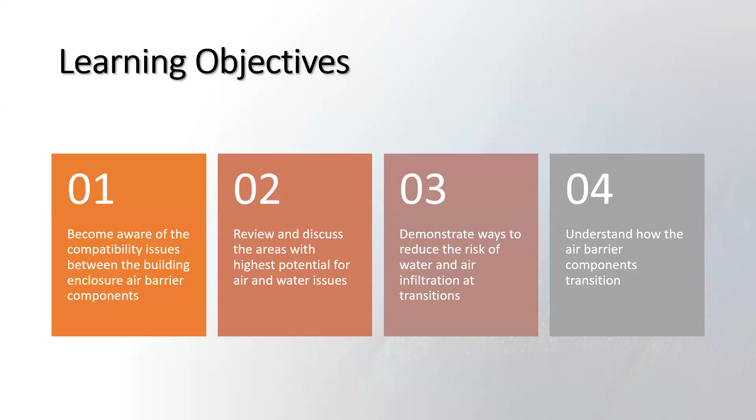With all that, my goal today is to emphasize how important it is to get the transitions right in the building envelope. And we're going to provide an overview of where those transitions are, the things that we have to keep in mind when we're determining what products to specify and install at these transitions.

The building envelope, it's a huge topic. We'll start our introduction here. There's entire presentations and lectures on the building envelope. But today, I figure this is a good place to start rather than jumping right into the transitions. The idea here is to keep the outside out and the inside conditioned air in. In order to do that, we need to look a little bit more closely at the 4 control layers. And these are the 4 control layers around our building envelope that we want to get right.

There's entire presentations on how you trace these layers. We need to understand each layer and its importance when we make decisions about what products to use here. At the end of the day, you want them all to work together, and they need to be compatible. So that's a hot topic and a concept that we'll discuss pretty thoroughly today. They need to be compatible and properly integrated.

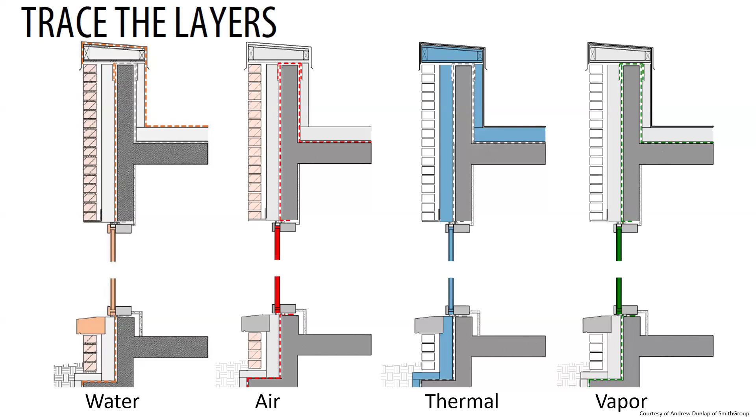So when you look at transitions as a whole, they provide that continuity for each of these four barriers: your water, air, thermal, and vapor. The number one job is to stop water. And it's no secret that water can lead to severe damage in our walls. Ideally, we don't want any leaks, but we also want to make sure that we're providing drainage for when that water does get into our walls, it has the opportunity to get out of the wall.

Number two, we need to stop air. The whole purpose of the air barrier is to reduce your airflow in and out of the building, and this is to prevent water and moisture issues. This little graphic on the screen, I think it's pretty astonishing that if you consider just a really small hole, 1 inch by 1 inch, over the course of a year, you can have 30 quarts of water get inside your building just through that 1 inch by 1 inch hole. And maybe you don't have a hole that size. If you break it down, let's say you have 4 holes that are each a 1/4 inch, it can still lead to this amount of water, which is, when you put that into perspective, quite a bit.

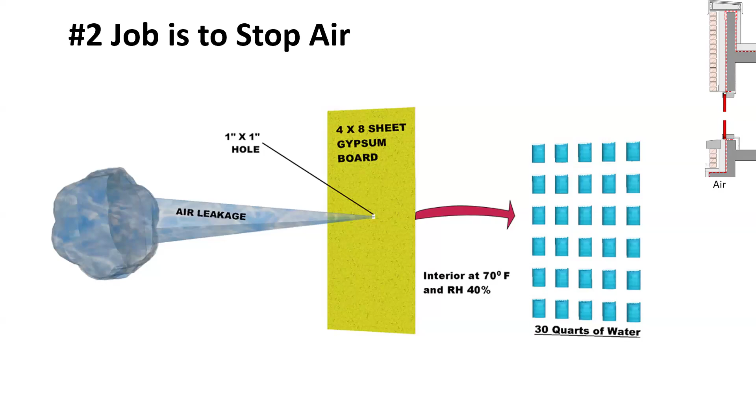The third layer here is our thermal control. A lot of people refer to this one as the building's blanket. This layer, we're not really getting into this one today. This would be your insulation materials, and the whole goal of those materials is to help maintain your indoor temperatures, reduce heat loss and gain, and just enhance your overall energy efficiency of the building.

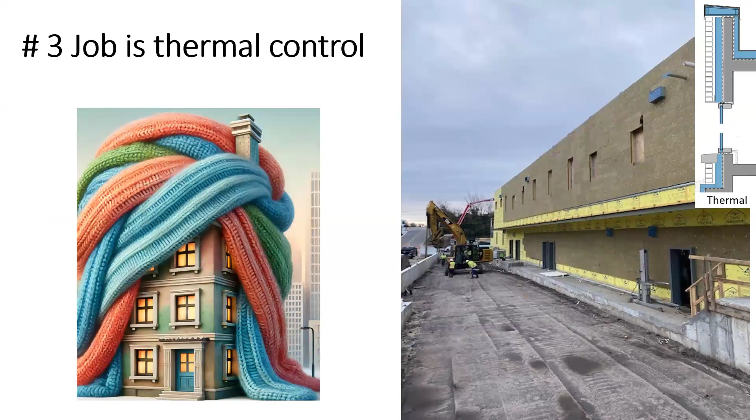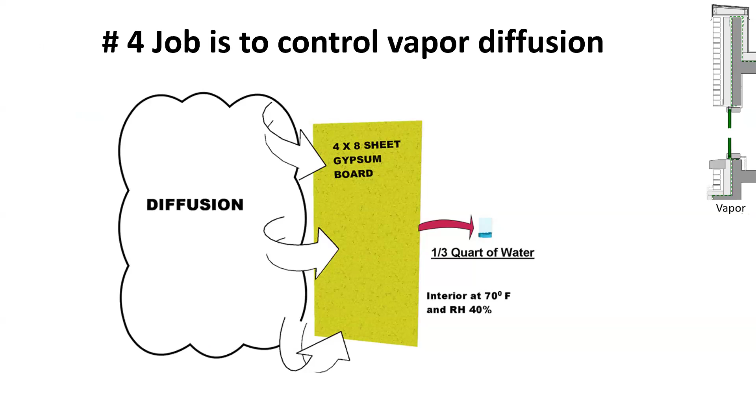And then the fourth layer, and again, this is just a really simple overview of these layers, and they can get pretty complex. We have a lot of materials coming together. This is just kind of to open up the presentation before we get into the transitions. The fourth layer is for controlling vapor diffusion. So we saw a similar image to the one on the screen now when we were looking at the controlling air slide. A lot less water than the 30 quarts of water that can result from a 1 inch by 1 inch hole, but it's still important to control the movement of our water vapor through the building envelope.

So you're looking at a big red line around your building. You may have heard of this strategy before, of putting your pencil down and tracing the layers without lifting it up. The whole reason we want to do this is to make sure that we're getting that continuity across our building envelope between our systems. So you can see that red line that goes all the way around the building, there are no gaps. And some people will call this the red pen test. The whole point of this is to identify all of the locations of the components that make up those 4 layers that we just reviewed: the water, air, thermal, and vapor.

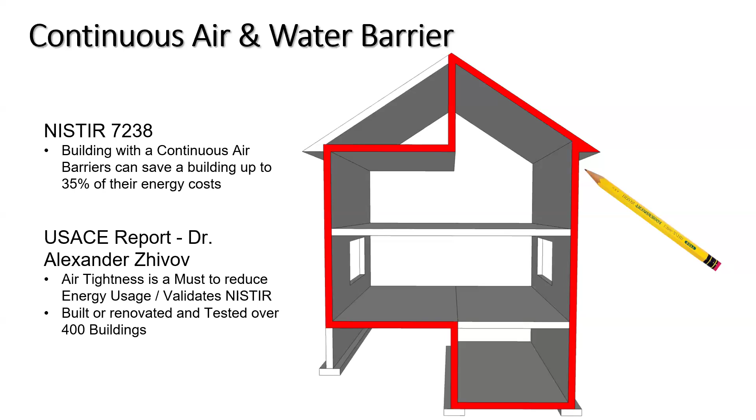So the question of continuity or compatibility comes up when we are changing from one system to the next, or we change from one product to another. And that's where we get into this whole idea of transitions. What is a transition? It's when something is changing in plane or material. So consider when you move from an air barrier to a below grade product, or from an air barrier to a roofing system. You can't just pick up your pen and restart the next system. It has to be continuous.

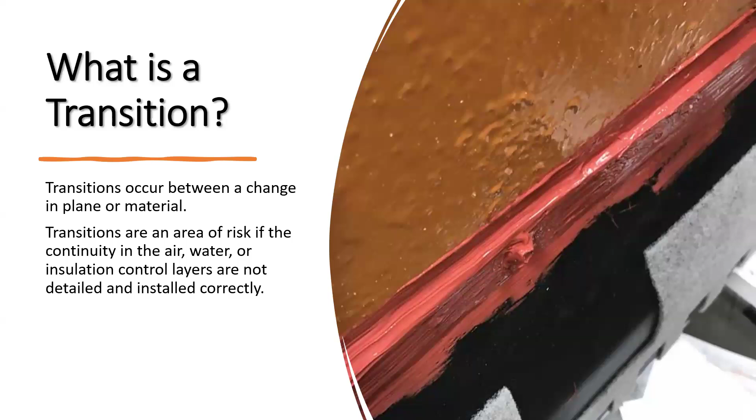And that's a lot easier said than done, especially when you have all these different chemistries. You have membranes coming in contact with liquids, and you have sealants and adhesives. At these locations, we introduce a transition product that needs to be able to work with those 2 systems that you're transitioning between. And I mentioned this phrase earlier: the transitions provide continuity for each of those 4 barriers: water, air, thermal, and vapor.

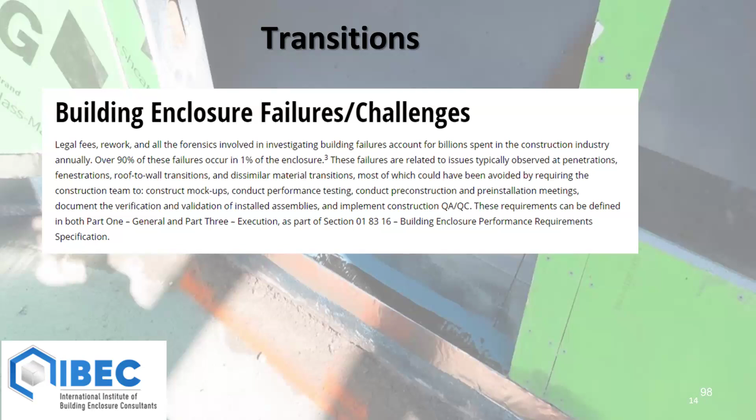Overall, transitions are a really small part of the building, so you might be wondering how important they really are. This is an article from the IIBEC Interface magazine. It's been a couple years since this one was in there, and it states that 90% of these building enclosure failures occur in 1% of the enclosure. Well, what is that 1%? These are the issues that we have at fenestrations, so our openings in the wall, penetrations, roof to wall transitions, and dissimilar material transitions. So 90% of these failures, even though it's in these small areas, this is where the issues can occur. Not all of them, but a lot of them.

Now that we know what this whole concept of continuity means, we want to talk about how we actually do it. So our focus today is on controlling air, controlling water, layer number 1, layer number 2. What do we need to make these layers continuous? So we broke it down. We're going to start easy here.

We have connection materials and a sound substrate. What are connection materials? Those are the transition membranes. So a self-adhered tape, a silicone sheet, and all the accessories that go with it. Your sealants, your term bars, your primers. Next, we need our sound substrate. So we need a good surface that the products will adhere to for the life of the building. And we're going to get a little bit more into that, but it's some things that are as obvious as making sure the substrate is clean and it's dry and it's solid and it's not mud and it's not water.

There's a lot of materials out there that you can use for transitions. A lot of manufacturers have their own transition material products within their own system. So that's not necessarily what we might be talking about today, but we're talking about when you have to move from one manufacturer to another. So a roof to wall or your air barrier to your below grade product.

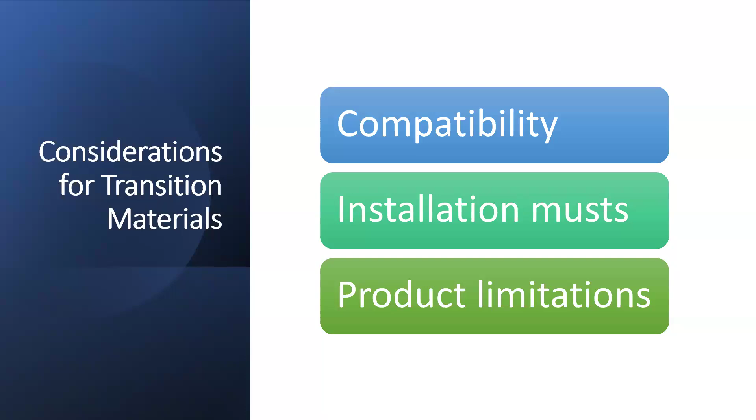When it comes to considerations for choosing transition materials, we broke it up into making sure you have compatibility between them. What are the installation musts? And then knowing your products. What are the limitations? How does the product need to be installed? And we're going to walk through each of these a little bit more in depth.

This first concept here is compatibility. Compatibility, we're breaking it down into making sure things are chemically and adhesively compatible. So when they're coming in contact with each other, are they chemically compatible? Meaning they're not going to dissolve each other or cause another one not to perform as intended.

This is actually a chart from the Air Barrier Association. They have a flashings and terminations committee. And this is something as simple as looking at all of these flashing products. And then going across the top, you have other construction materials that your flashings may come in contact with. There's no manufacturers listed here. So this is literally just generic, non-proprietary.

Within each one of these categories, there's multiple brand names and different types of chemistries. And even if it's a peel and stick butyl membrane, they're not all created the same. So you have different chemistries within that. This is a really good chart.

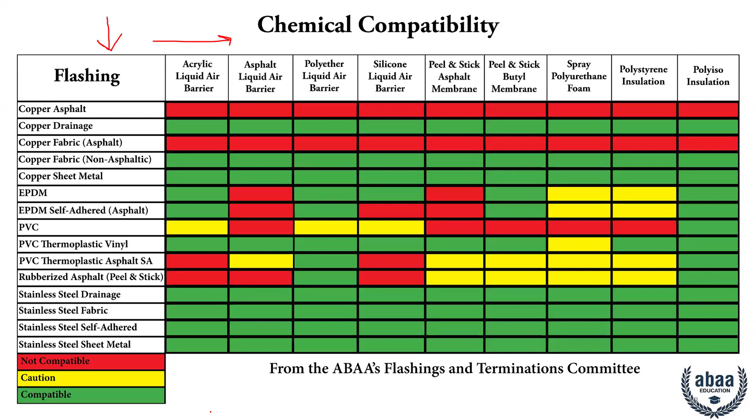We use this chart here as a good start, but I highly encourage everyone to use their reps, lean on the manufacturers to write letters of compatibility between neighboring materials. We do it all the time, and it is something that we're more than happy to help you with on projects.

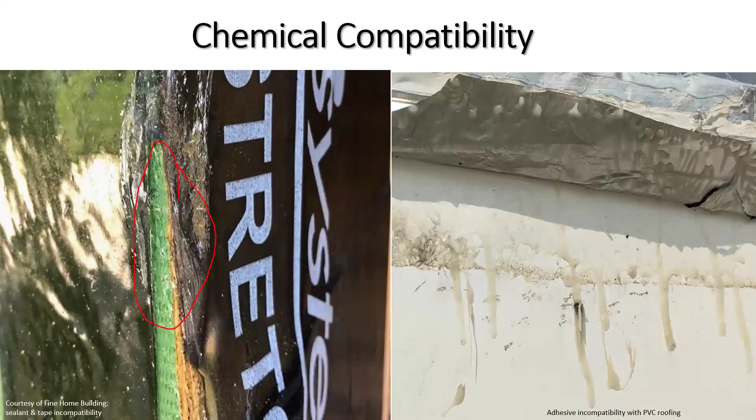Had they caught this prior to installation, they could have figured this out. If they had sequenced them differently, they wouldn't have run into this issue. Two good products, but not chemically compatible when they came in contact with each other.

Another approach to compatibility is adhesive compatibility, and that is, can things stick together? Not just on the back of the product. If you're using a self-adhering membrane, people will ask, what's the adhesive? Some products have an acrylic, some have a butyl, some have a pressure sensitive adhesive. Not just the adhesive on the back, but what's the facer? If you're going to be overlapping other materials on top of it, is the facer a material that is a good surface for other products to bond to?

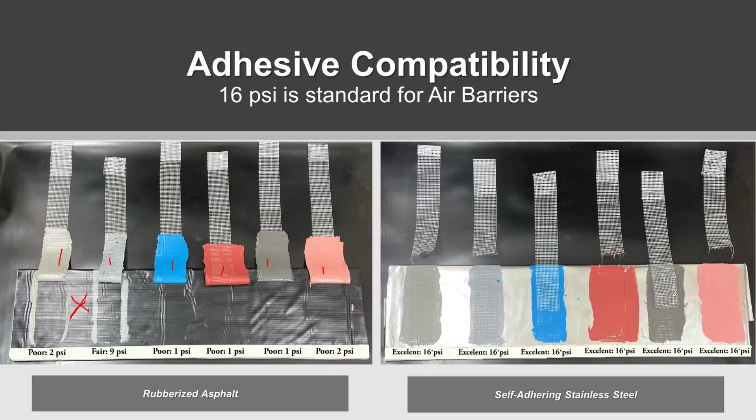And this is showing you that not all products are the same. You have a polyethylene, a cross-laminated polyethylene, essentially a plastic facer. And you can see all these test strips that were pulled up, and they pull up pretty cleanly because those liquids and sealants don't bond onto that facer very well. On the right-hand side, you have a stainless steel faced product where everything is sticking on, and you see those test strips that actually broke when they tried to peel them off.

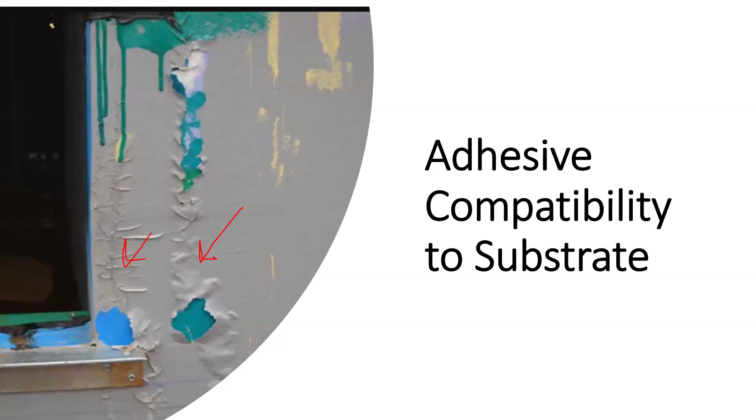What this looks like on a job site, you have a fluid air barrier. You can see it here, it's actually delaminating from the facer of the product that was used in the rough opening. It doesn't always have to be this extreme. This is a pretty obvious adhesive compatibility issue. It might not happen initially, so we want to be mindful of the products we're putting on top of each other, especially at these transition locations. At the end of the day, whatever you're using, it has to stick.

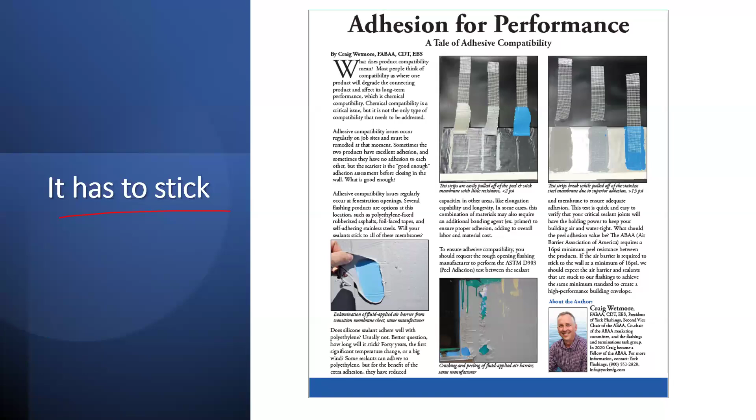There's a lot of great articles out there. Some things are obviously hard to stick to, like mud, water, and holes. But there's also things we deal with on job sites, like polyethylene, that we may not realize is a facer on some products that some of our sealants don't adhere very well to without a primer.

We just looked at compatibility. Next up, we're going to look at the installation must-haves, and that is sequencing, substrate, and rolling.

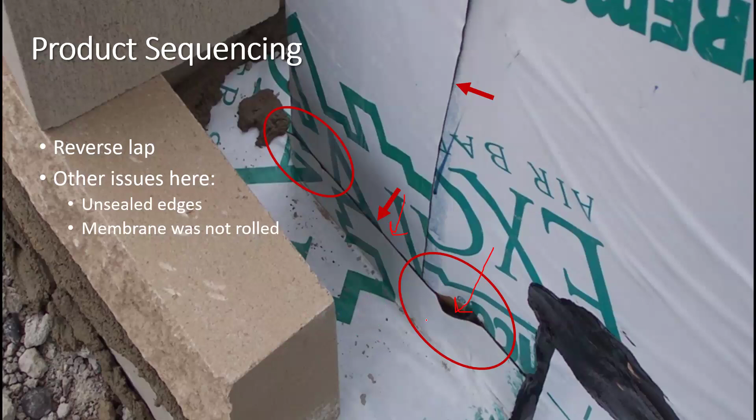In addition, another note on the product sequencing, what you're seeing could also be classified as a compatibility issue. We have a rubberized asphalt flashing that was lapped on top of the PVC roofing, and you can see that those plasticizers got into that asphalt and caused it to drool. Had the PVC been reversed and gone on top, the material would not have done this.

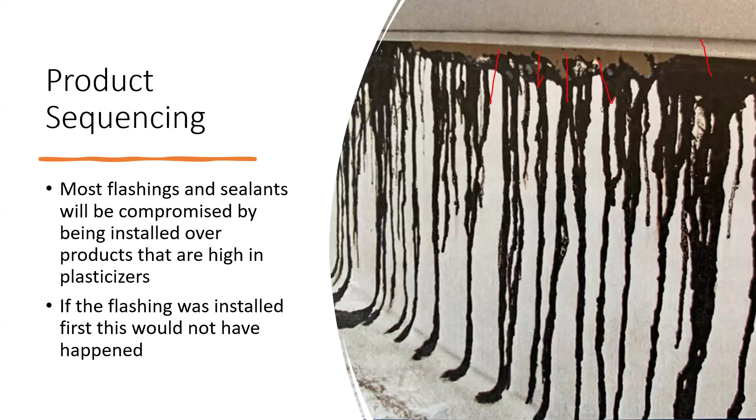There's a roofing manufacturer that I was on a webinar with a few weeks back, and they actually had a similar picture as this, and the roof was only a year old. So it doesn't have to take a long time for these product sequencing issues to present themselves.

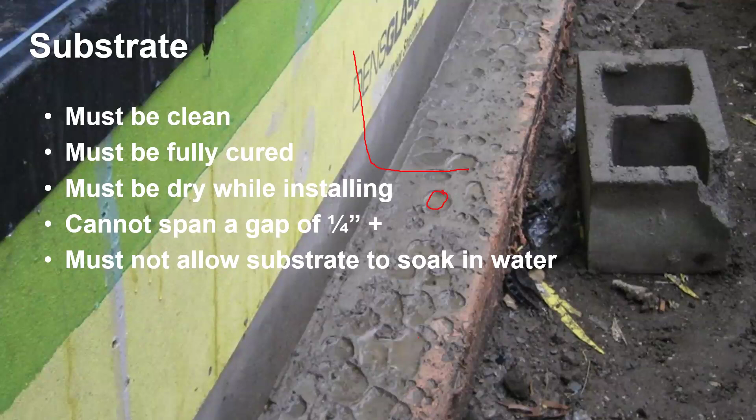The substrate needs to be clean, fully cured, and dry. Before we're installing our transitions, we need to make sure that substrate is ready. Like I mentioned earlier, you go and put a flashing down here on this wall. Some of this is pretty obvious, right? You've got these voids filled with water, it's clearly covered in mud, gaps, wet concrete, but we need to do our housekeeping before we put these materials down.

Self-adhering membranes, per manufacturer's installation instructions, need to be rolled, so we have to hard roll this in place. Also, some require a primer, some don't, and if it does require a primer, you want to take that into account. That adds material and labor costs, and can double the installation time.

I was meeting with a contractor out on the West Coast about some installations, and we brought up the topic of primer, and he said something we forget too is the absorption rate. Sometimes we have to even go back and reprime surfaces twice. He said we really just hate doing that because of the time and then waiting for it to cure, and if you don't account for it, this is just more time and money adding to the project.

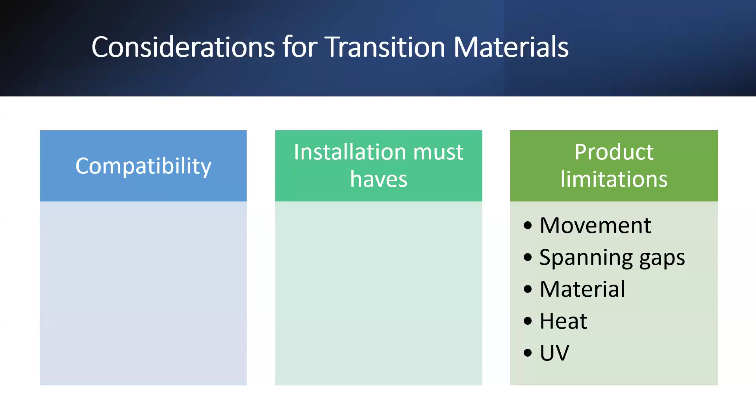We talked about compatibility, we talked about the installations. Now we're going to talk about the product limitations, and we need to make sure that we're using the right products in the right places. First up, we have movement. Different materials have different movement capabilities, so we need to find out if this transition is in a condition that needs to allow movement.

We were contacted about a project where the architect was looking for a product to use in a spa-to-pool transition. The transition membrane needed to be sealed to hot applied waterproofing on one side and bare concrete on the other. The first thing we asked is: is this a dynamic or static joint? Because some products will stretch, right? They'll stretch, but they don't go back.

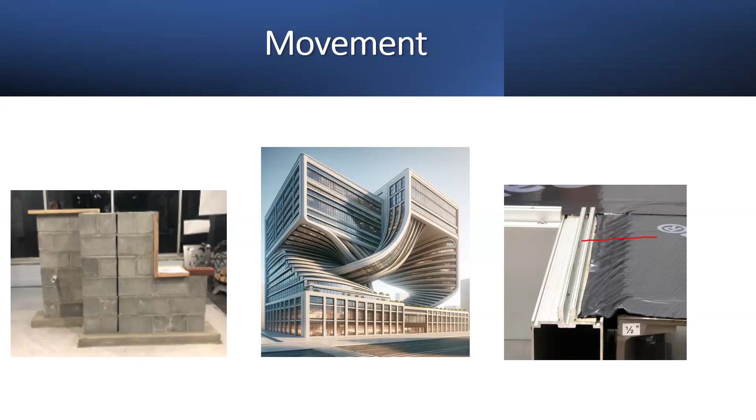Like a rubberized asphalt, you might be able to stretch it, but we want something that, if it needs to accommodate movement, can do so over and over again without being compromised. So movement is a product capability.

Spanning the gap: rubberized asphalt membranes typically cannot span greater than 1/4 inch. We say that and think, okay, that's not going to happen, but then we look at how big 1/4 inch is, and it's not a lot at all. So we need to know what products can and cannot span gaps. If they can't span gaps, then they need to be supported.

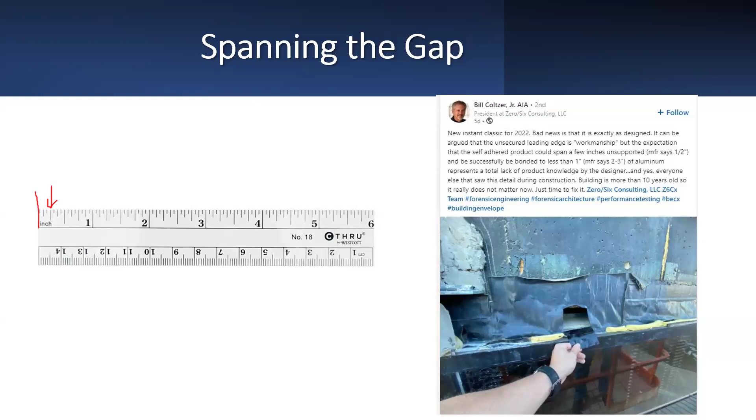We're looking at parapets, through wall flashings, your air barrier. When your air barrier transitions to your through wall flashing, can that through wall flashing span a gap? If we have to support it, that adds material and labor costs. If we're not supporting these products, we don't want them sagging and drooping in our walls where they can end up holding moisture.

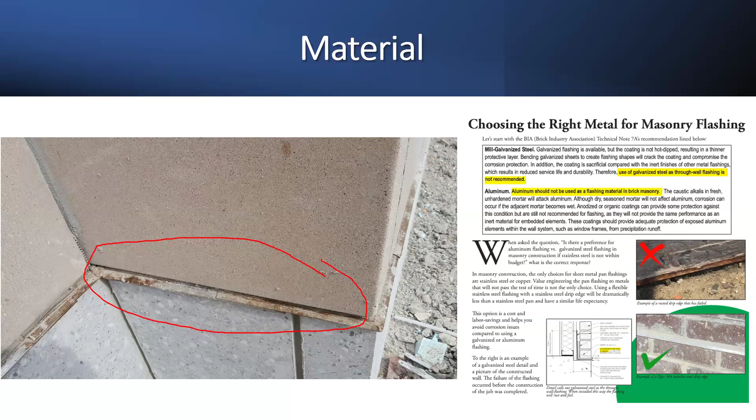Some materials don't perform well in certain environments and they might fail over time. This could be due to various reasons like corrosion or degradation when metals are in contact with incompatible materials. I'll point out this picture on the left-hand side: this is a drip edge, and you can see it's rusting. This project wasn't even completed yet. Unfortunately, to replace it, you have to tear down some of the wall, and when these materials aren't easily accessible, it adds to the importance of getting them right the first time, because these fixes can be pretty costly.

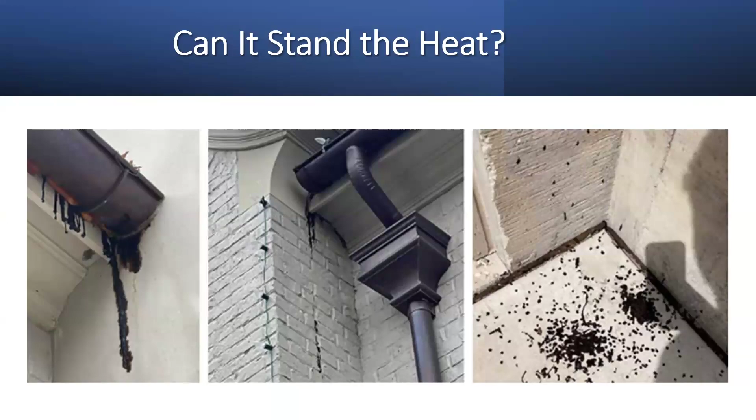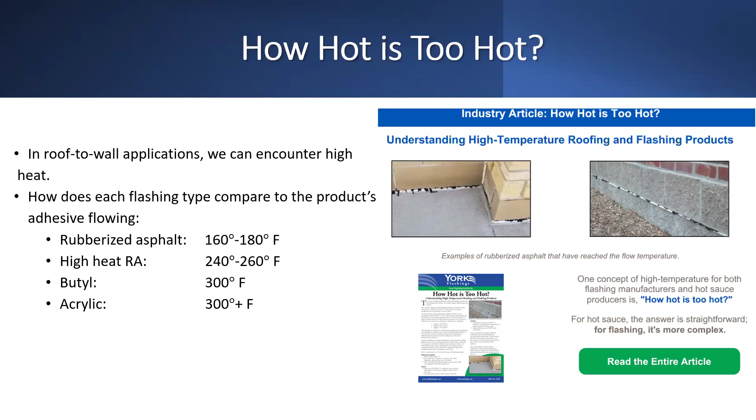So you have to know, what's the condition the product's going to be in? Is it a roof to wall transition? Is it under a rigid metal flashing at a parapet? Is it a through wall flashing connected to a rigid stainless steel drip edge? That can really heat up the membranes, because those stainless steel pieces are exposed to the sun.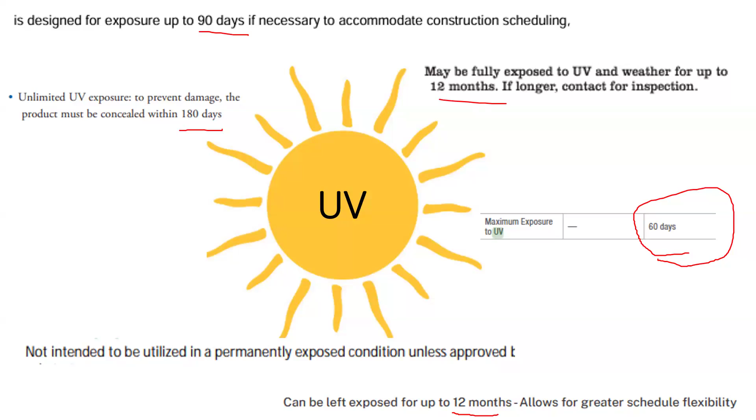60, 12 months, 180 days, 90 days. We might not always expect these products to be exposed for as long as they are, but we all know what can happen with material delays, weather, and different scopes coming in at different times. We need to know the UV limitation, and proper or improper sequencing can really play into compromising the integrity of these materials.

We just reviewed all the considerations. Remember that statement from IBEC: 90% of building enclosure failures happen in 1% of the enclosure. We have a lot of complex walls and assemblies, a lot of things coming together. We need those transitions to provide continuity.

Building science tells us how important these transitions are. We have modeling that we do now, we have air testing, and advances in all of that really show that these little transition areas can cause a lot of issues with our building performance. We don't want those transitions to be the weak link, and we need to know where they are before we can make sure they're correct.

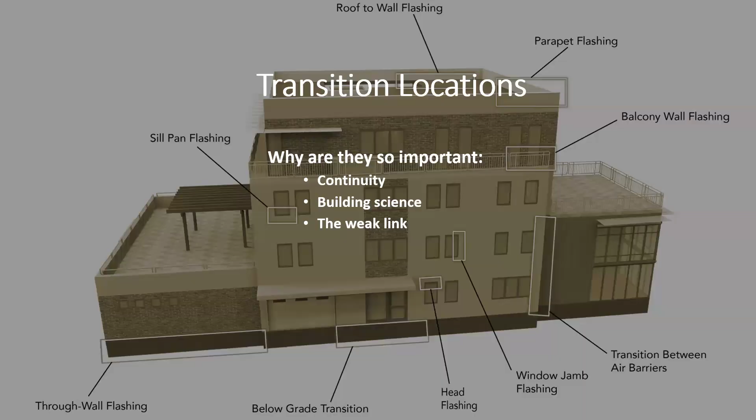Hopefully at this point you understand the importance of transitions and things to keep in mind when selecting these different materials. There's a ton of different materials out there. The manufacturer's installation instructions, compatibility, and sequencing all play in when we're providing these project-specific details.

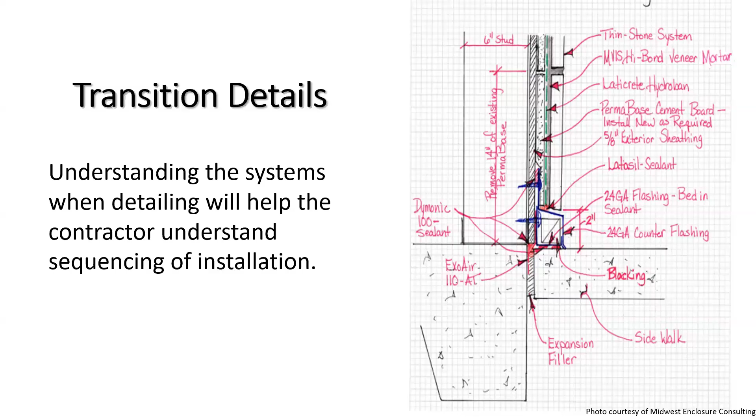We're going to look at the next handful of slides at some of the specific areas where these transitions occur, and maybe some ideas that can help you on future projects tackle these situations. The first one is below grade waterproofing to the air barrier.

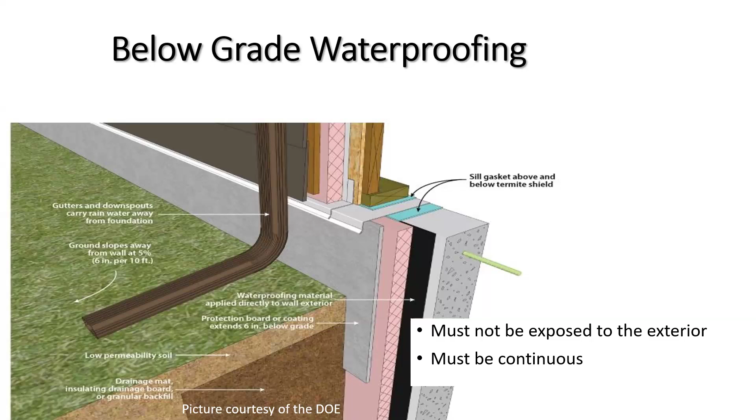Before we talk about the transition, a few basics about below grade: it can't be exposed to the exterior and it needs to be continuous. We need to make sure the below grade transitions to the air barrier, and you can do that in many different ways. It needs to be installed correctly because it's not exposed—that's the whole point, so we don't see it when the building is finished. But when there's a water intrusion issue, it costs a lot to fix because we can't easily get to it. So here is an example.

When we specify or detail a transition membrane, there's a few things to check for. Compatibility, chemical or adhesive—does the substrate need a primer before applying the transition? Check the cure times before we put something else on top of it. Some products say the concrete needs to be cured for 14 days. If things aren't fully cured, they can continue to off-gas, and that can cause delamination when we're putting products on top of it. The sequence of installation goes hand in hand with compatibility and the ability of materials to lap on top of each other.

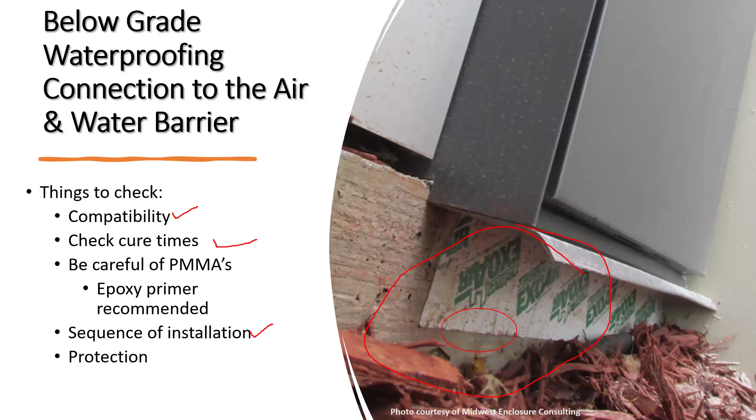The next location is a transition between different air barriers. We started talking about this a few years ago, and it was definitely a lesser known application. Like, why would you use two different air barriers on a project? Now it's not so much a foreign concept.

This is a picture on the right-hand side. It's an aquatics facility, and you can see right in the corner that small sliver of an air barrier, an area where they could not bring those two air barriers together. They needed something to transition those two together to provide that continuity and prevent them from coming in contact with each other.

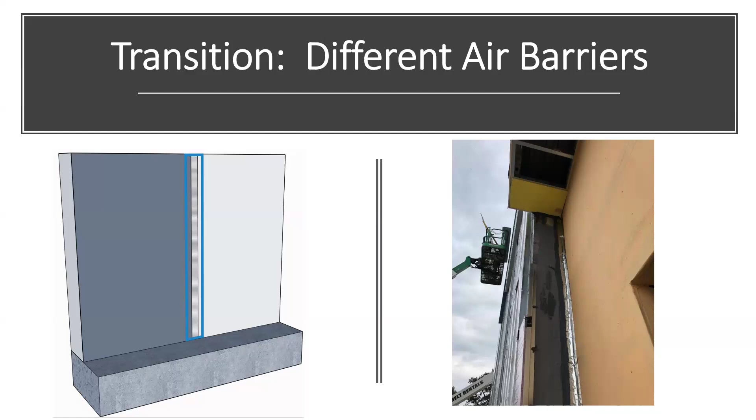Like a lot of details out there, there's multiple acceptable ways of doing things. Here's an example of one. It was correct, but maybe a little more complicated than it needed to be. This was the neat detail put together by an architect, and they had two different liquid applied air barriers that needed to be transitioned, but they were not compatible. So you have A and you have B, and you can see what they did there is they had put a piece of rigid metal flashing between those two.

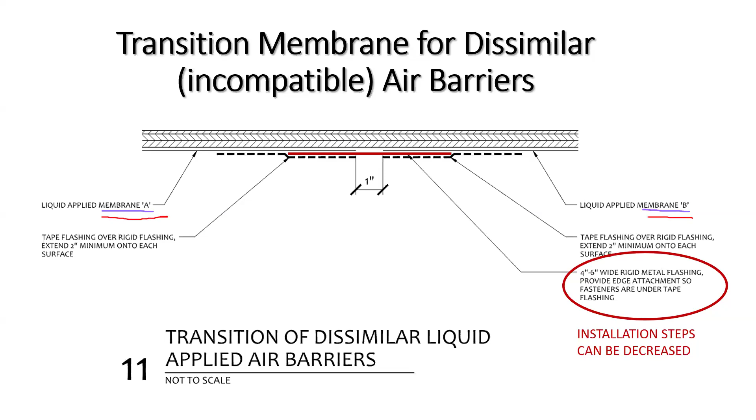Then they used different tapes, each air barrier's flashing tape on top of it. You have a lot of layers here and a lot of things to work out with who's coming back to install certain parts of this. Did it work? Yes. Can we provide a little bit of an easy button?

This is what could have happened for the same application in the slide prior. Two different air barriers that needed to transition—we can simplify it and use a product that everything is compatible with. Obviously there were a couple steps that were reduced here. What does that mean? It means we're saving money, we're saving labor.

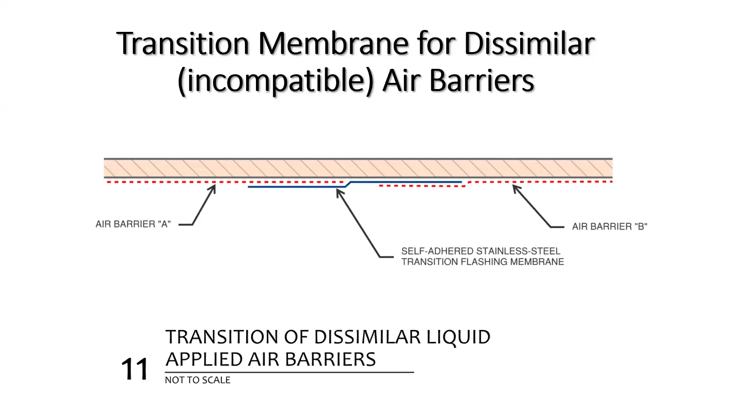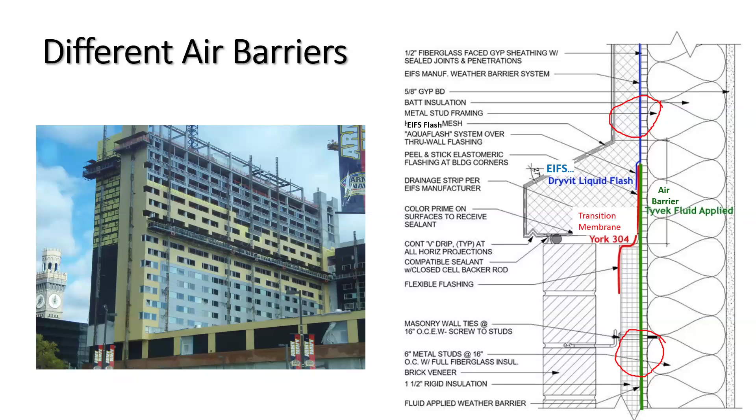Same condition, but one was quite a bit easier. Another example of what we just looked at - you want to make sure you're testing everything, looking at things from the chemical side, the adhesive, testing in both directions. They had a blue air barrier and a green air barrier, not literally, but for the sake of this detail, they needed to transition those with a membrane compatible with both. It's not the only way to do this, but it worked well for them on this project installation.

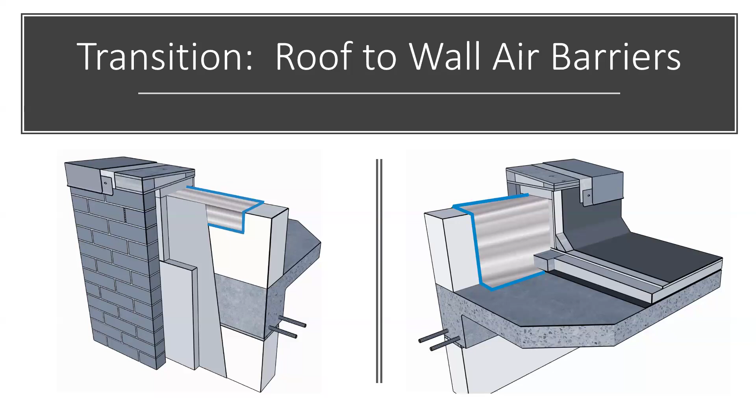The roof to wall - this is another big transition area. Some of the largest holes in the air barrier system are found here, and more specifically at the parapet. We can't have gaps. You'd be surprised how often this happens, and you'll notice this.

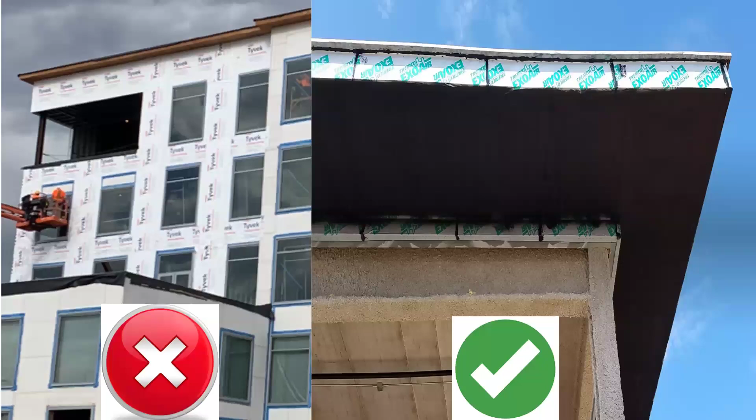The crazy part is this picture on the left is right near that building from the previous slide. We have another roof to wall connection that was missed. It needs to be continuous on the right. You can see they did a transition - that black is a fluid applied material. They didn't use a membrane here on the underside of this horizontal due to some product limitations. I don't know what the rest of the construction looked like, but we need to make sure we're completely sealing and transitioning this. No obvious big gaps at that roof to wall connection here.

The issue is there are a lot of roof systems out there, and they're limited to the types of products they can transition to. There's a lot of different formulas, a lot of different chemistries going on. So what is the compatibility between the roofing system and the wall air barrier system? It needs to be detailed with this in mind. If you need a separate transition membrane incorporated, you've got to backtrack through the presentation and take all of these things into account when selecting what material to use.

I do want to shout out the Air Barrier Association. They have a set of roof-to-wall details and guidelines expected to be available sometime this quarter. They've been working with the consultant to do these in 2D and 3D.

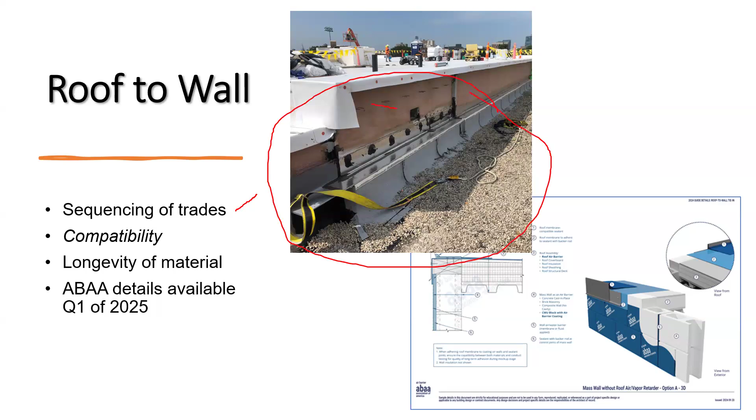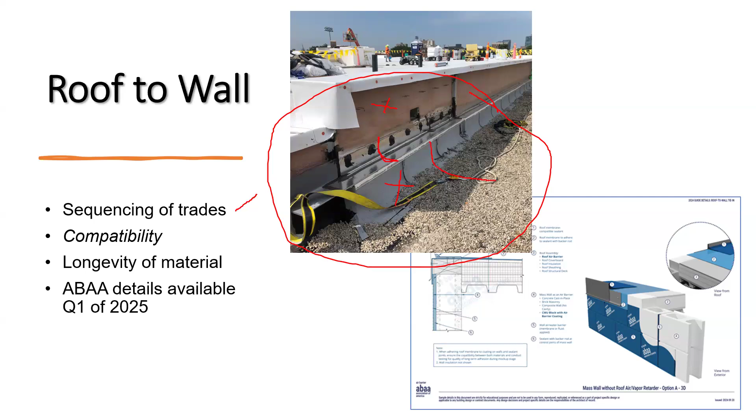The longevity - I haven't really talked about this one yet - is the mindset that whatever you're using to transition two materials together, make sure it can outlast the two products you're bringing together. You don't want the transition to be the weak link. On this detail, you have two different products, a wall and a roof material system, that needed to come together. They put down this product first, so you can make that transition. You do the red pen test, bring it up, and there's no gap - you're not stopping and connecting to the air barrier. It's continuous all the way up that wall.

This isn't roof to wall, but top of wall. We want to make sure the top of wall is protected during installation of the air barrier - meaning seal off the top of the wall. The recommendation, again from the ABAA position paper, is to use a self-adhered membrane. You don't want to put the air barrier on the wall on a Friday, then come back Monday after a couple inches of rain over the weekend. That self-adhered membrane at the top of the wall can dry in your building, using a material that's durable, UV resistant, and compatible with whatever goes on the wall. You don't have to come back and remove it.

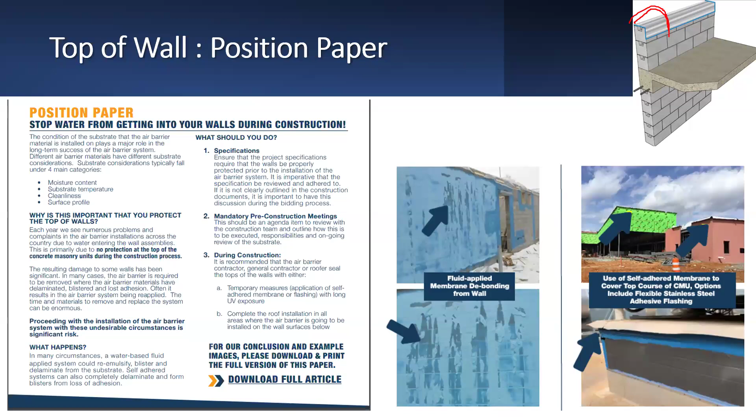You might be wondering how big of an issue this could be. Well, in these pictures, even though they're small, you can see a fluid applied membrane that's delaminating, debonding from the wall. And it's not a rare occasion - this happens.

Through wall flashings, we have another transition here. We're a little biased at York - this is one of our favorites.

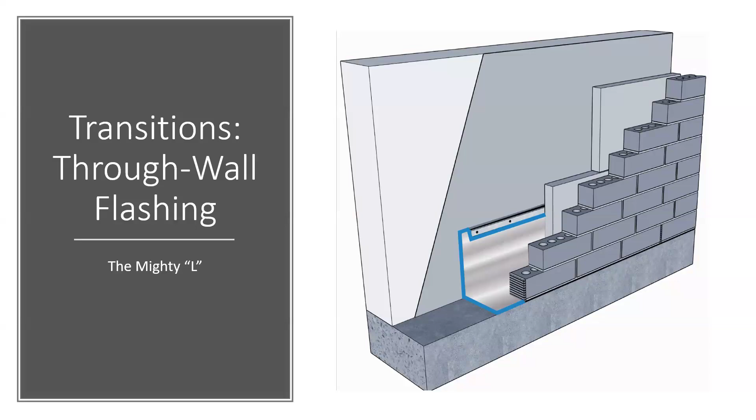But through wall flashings are part of the building envelope, and your air barrier has to integrate with it. So when it comes to flashings, the whole point is to collect the water and get it out of the wall. Flashing does a couple different things, depending on where it's located.

It can prevent rising damp. It protects our structural steel at our shelf angles. It's important that when we integrate this with our air barrier, it's compatible - something as simple as this little bead of sealant at the top of our termination bar, is it compatible with our air barrier on the wall?

So this flashing - people will call it that little line on the bottom of the drawing - it's so critical to make sure that we're getting the water that gets into the wall, out of the wall. It's kind of like that last line of defense, and it is not to be overlooked in our building envelope.

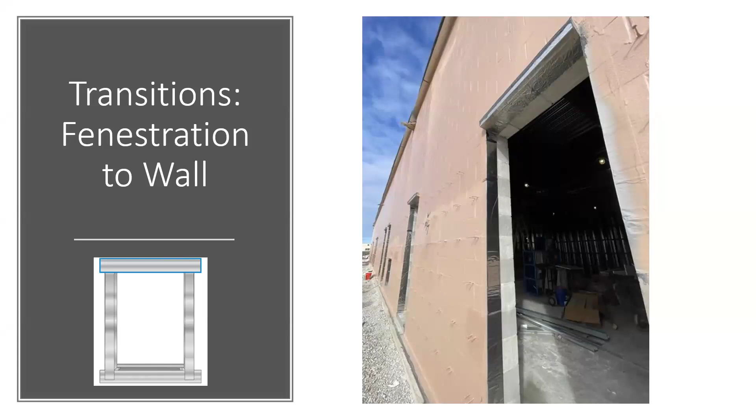The last location we're going to look at are the fenestration to wall transitions. We have lots of openings on our buildings, lots of opportunities to get it wrong. Where are the fenestrations in our walls? We're talking about all the holes in the wall. If you take a quick look at this building, if the transition is missed here, we have plenty of areas where this building can leak.

As with all the transitions we talked about, we need that continuity. You can do transitions at this fenestration to wall with a sealant or a membrane. When selecting a sealant or a membrane, you want to take into account how big is that gap, that difference in plane between your window and your opening, what type of movement is going to be taking place there, and the substrate - making sure that substrate is ready for the material, and is it compatible with what we're putting on top of it.

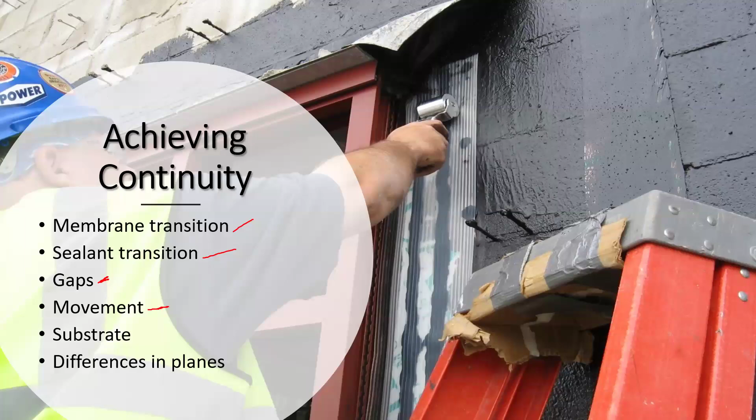There are other membranes out there - rubberized asphalts, flexible stainless steel. Sure, the flexible stainless steel is durable, but it doesn't stretch. And remember, we not only want the membrane to be able to stretch, but we want it to be able to allow movement over and over again. When you start to build up the layers of membranes in these applications, like you see over here, it's just something you don't want taking place there.

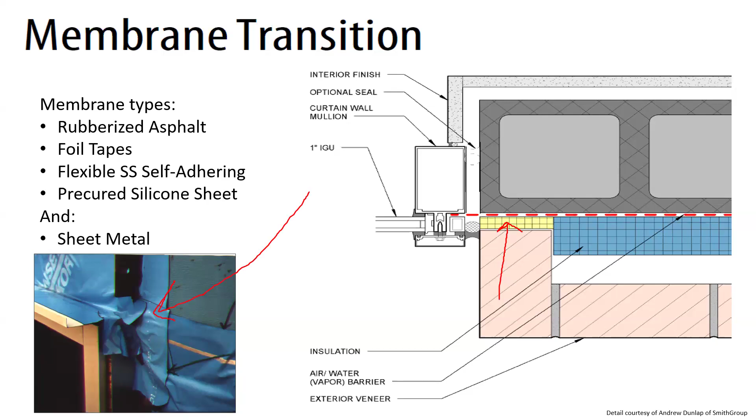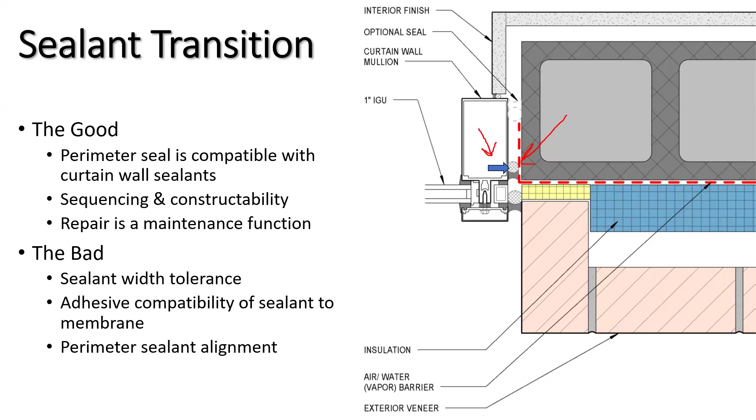But there's a bit of a conundrum here, because some manufacturers' facers on that red dotted line are only compatible with their own sealant. But the curtain wall manufacturer may require their sealant to be used with their curtain wall installation. So it leaves you in a bit of a dilemma - what do you use? Well, you need a transition that's compatible with all sealants.

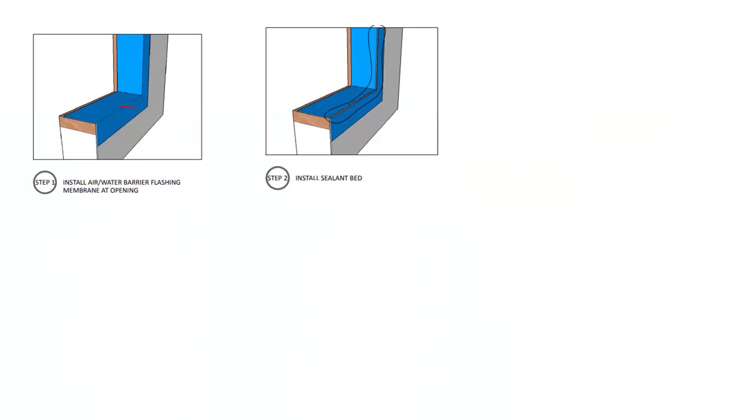And all you're doing is moving that attachment point of your flashing. I'm not telling you that you need flashing. You already need that. I'm just showing you a way of attaching it. So rather than in your sill, you're going to be attaching it to the front face of the wall. And this is what you would do. You would do your air barrier, your water, your rough opening detail the way you normally would. You put a bead of sealant in.

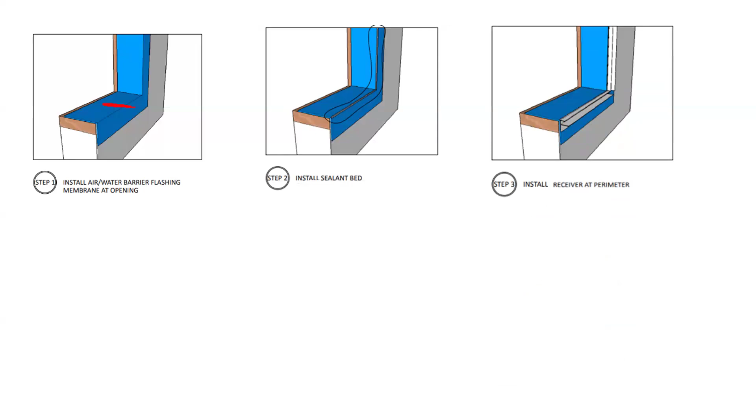This is where the product comes in. It's a receiver that goes onto the front face, that vertical face of the wall. Then you would put in your perimeter seals and your fenestration. So at this point, your building is dried in. And you have that circled area where your perimeter seal is coming in contact with the air barrier. It's not being interrupted by a piece of flashing.

Now you can put in the insulation and the cladding, whatever that is. It does not have to just be masonry. And you don't have to worry about working around a piece of flashing hanging out of the wall that could get damaged, and more importantly, damage that perimeter seal. Lastly, you have the piece of flashing that clips into place, and then you'll seal all of the edges there. So this is just a method of attaching that fenestration perimeter flashing.

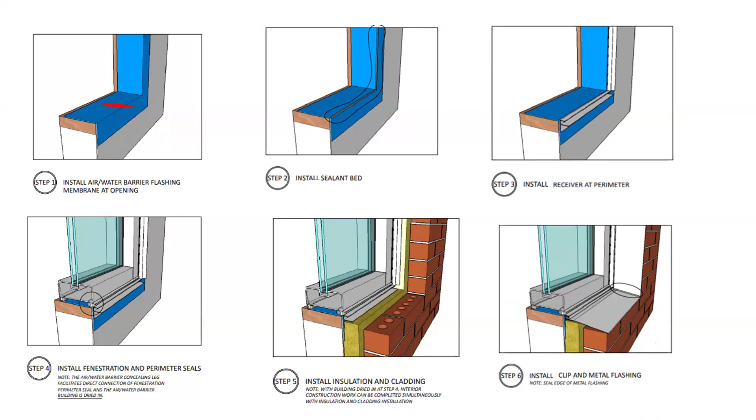Benefits: mitigates thermal bridging. You don't have your flashing running underneath of that window anymore. It's flexible, so you don't have to put in your flashing before the window goes in, because the building is going to be dried in without the installation of your flashing. You're not interrupting your primary seals. You're not going to be fastening that flashing in your rough opening. So you don't want to be putting fasteners in this rough opening because you need to attach your flashing somehow.

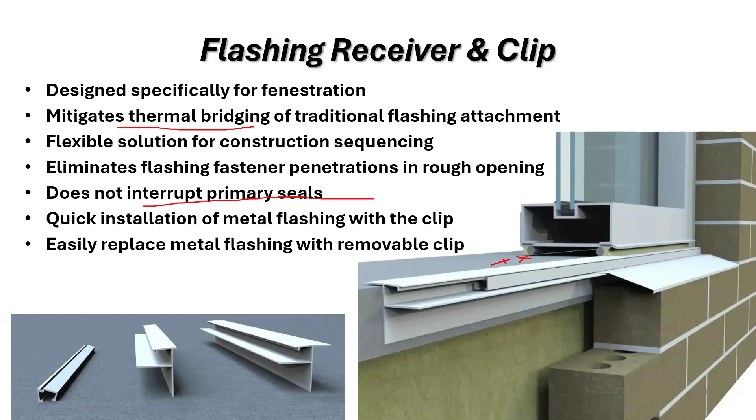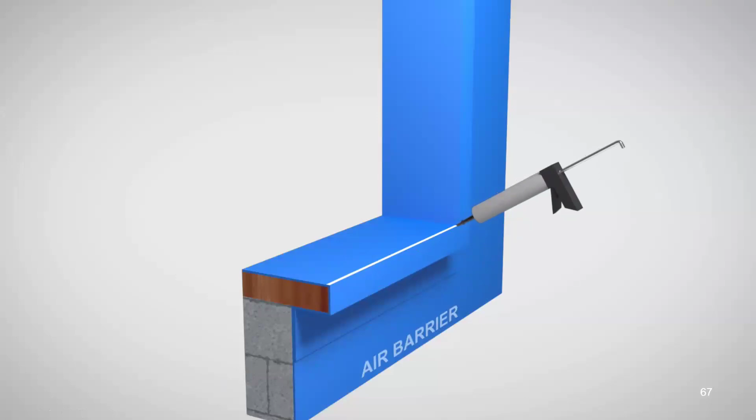And then replacing the flashing is pretty easy, because you just pull out this clip and you put a new piece in. And I'm going to show you a really quick video here. I forgot I actually did have a video. That's the receiver piece. You can see how the pieces start to fit together here. The last piece that comes in will be your flashing clipping in place, which gives you all the advantages that we just talked about.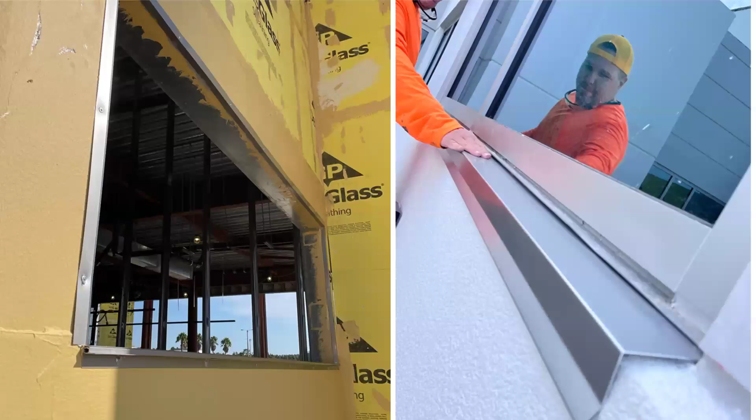So while we're talking about our fenestrations, thought it'd be a good time to put this in here. Here's a project in the southeast part of the country. They have the receiver in, the picture on the left. The receiver is in place. The wall is not finished. The picture on the right, they're coming back and they're just clipping that flashing into that receiver. So that flashing you already need, this is just a method for attaching it.

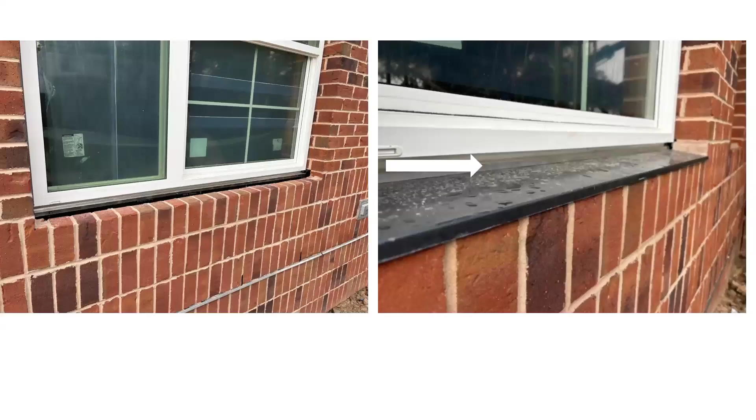And here's another one. You can really see how the aesthetics go with this really, really small sliver. This is the product. It's a really little piece of metal there of the clip that you see. And this is the flashing that was clipped into place.

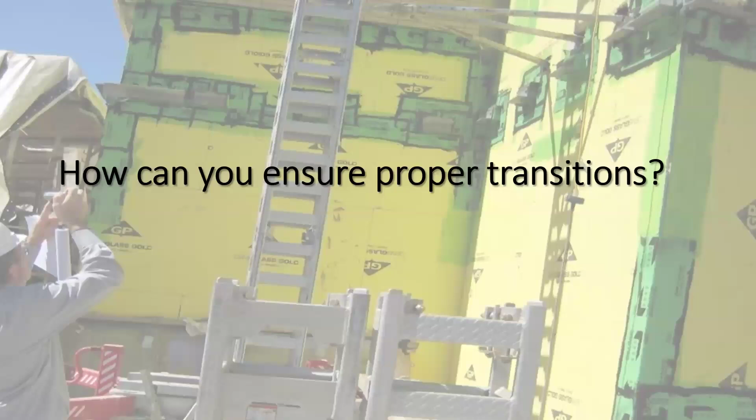All right, so I'm going to wrap up here. So we're coming down the home stretch. We talked about the importance of transitions, things to consider for the material selection side of things, where the transitions go. Just a couple wrap-up points from the presentation, where we go from here and what else we can do. Specifying the right products and detailing it.

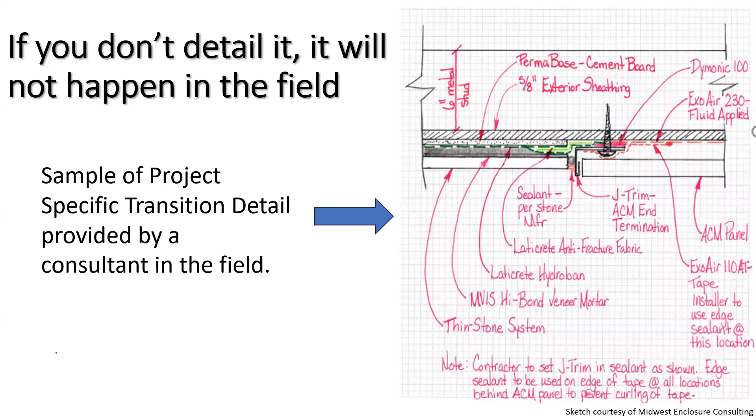This on the screen is an example from a project. It was a transition detail. It was missed in the construction documents. This project later on brought in a consultant. This one detail required 3 different trades to coordinate together and execute it. So like the slide says, if you don't detail it, it will not happen in the field. These small little transition areas are really important, because rarely is it the middle of the wall. It's where you have these products coming together. And this is where the challenge happened.

Pre-construction meetings: I just want to emphasize the importance of walking through these together and communicating. The pre-construction meeting is a great time to discuss the transitions between the different trades, the roof and air barrier installer, the sequencing, the schedule, the who and when. So coordinating between the subs, I can't stress it enough. You can confirm together what trades are arriving and engaging on the job site at different times.

A little more in depth, we call it the pre-installation meeting. This is more product specific. If you have questions about the flexible stainless steel transition membranes or flashing installation, we can come and review a project specific detail and make sure that you are on the right path with the product and how it's installed. The whole point with this one is getting the manufacturers involved.

We can help. Also, I just did a whole presentation on transitions. If you're doing a mock-up, please include the transitions in the mock-up and test it. A little bit of investment and time on the front end can save a lot of issues on the back end.

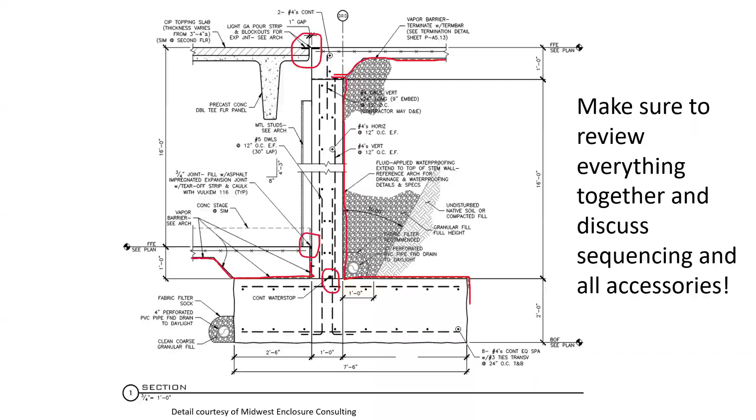Don't forget the accessories. If you don't have these systems' required accessories like the end dams, the corners, the terminations, it can result in a whole system failure. So really good materials can go wrong this way. Don't forget about those.

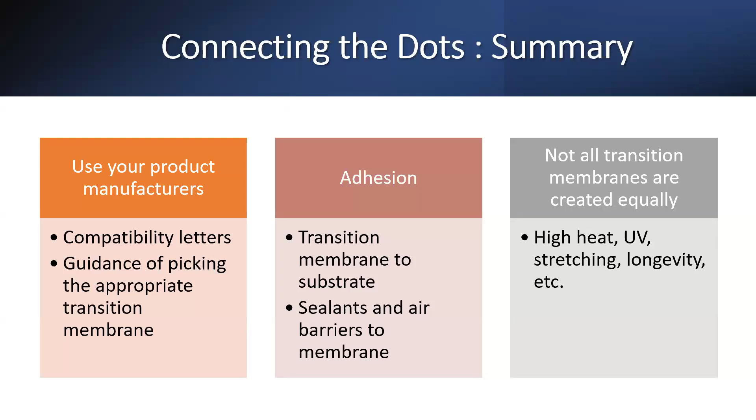I'll summarize this by saying there's a lot of choices out there. I hope that I brought some light to transitions for everyone. Make sure they're not overlooked. Make sure you know where they are, and make sure you have the right products to bring them together. And you can see on the slide, those are the 3 categories that we broke the presentation down into: compatibility, the adhesion, and then individual product performance. We can help you with a lot of these things. Lean on your manufacturers.

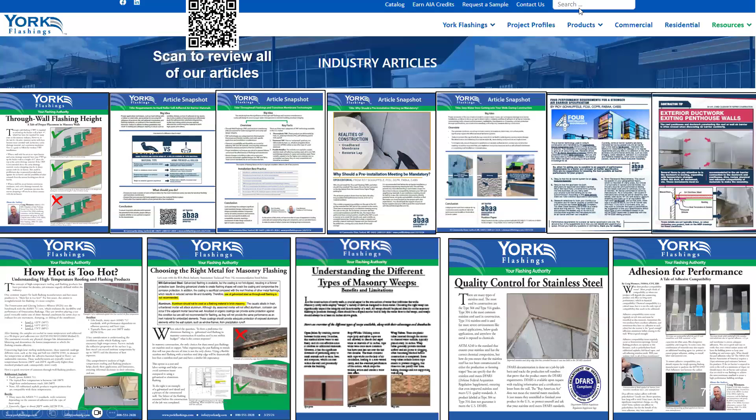So first, somebody wants to confirm something that was on one of the slides. On the rusting through wall flashing slide, they want to confirm that galvanized flashing through brick walls is not recommended. Is that correct? That is 100% correct. And that's a really great question, so maybe it's on here. Yes. So this QR code, it's almost like I planned that one. It was so perfect there.

We have a tab on our website that will take you to industry articles. Choosing the right metal for masonry flashing: we talk about galvanized and aluminum flashing choices in there. And we do quote BIA, which is the Brick Industry Association. So this is a really good reference. If whoever asked that wants more on it, your answer is right here, and it'll be perfect for you.

I have someone who is asking if you could clarify what PMMA stands for. Yeah, that's just a type of roofing chemistry. I don't represent the roofing line on that. Kayla, I'll get the list of questions here. Okay, cool. I'll connect you with someone who can answer all of your PMMA roofing questions.

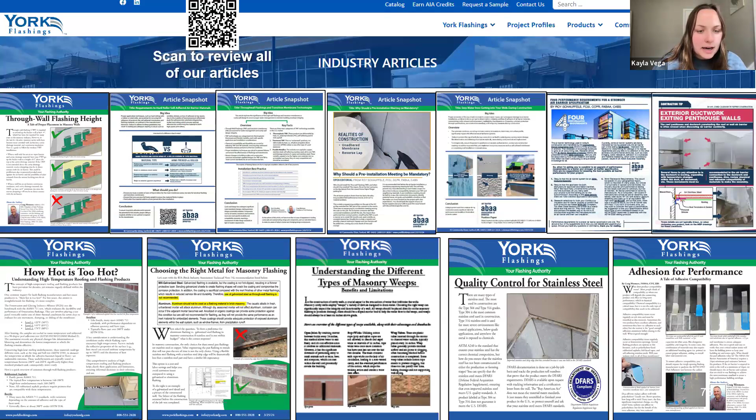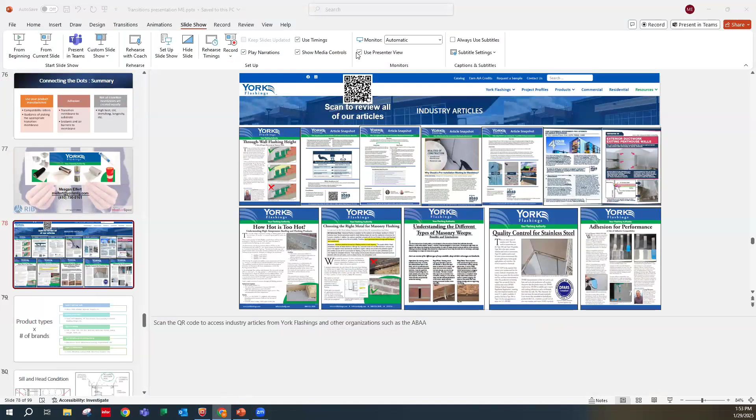Next we have: do you have any typical details on your website, or what are some good resources to see transitions from below grade blindside waterproofing to the WRB at grade? Yeah, another great timing here. We just added some details for our York 304 SA. So that's the product, whoever asked this question, great question. Thank you for sending it in.

That's what I want to direct your attention to. That's our self-adhering product. And let's see if we have our air barrier below grade transition. Let's see if this comes up here. We just started adding some of these in 2D and 3D.

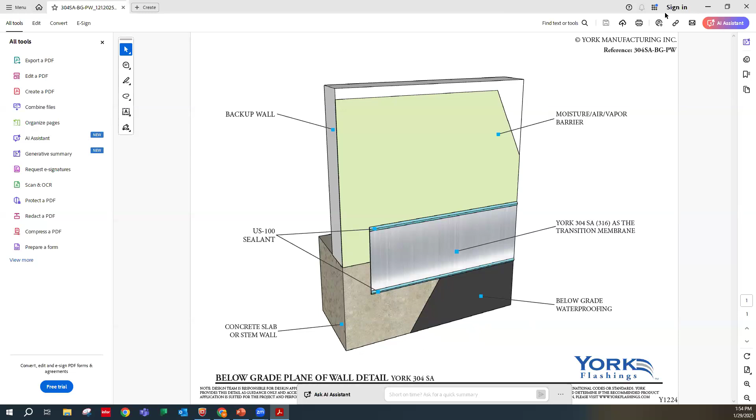So we do have some best practice, at least guidelines for your transitions that will, I think, start you in the right direction. But I would encourage you to reach out to me, because with some of this stuff, like primers that are recommended and below grade products, it's always good to know what the tech data sheet is for those specific products. But we do have on our homepage, if you go to York 304 SA, a whole list of details that I would encourage you to start with, and then we can go from there.

Great. All right, let's see.

What is the name of the perimeter seal flashing receiver and clip? Is that something that multiple manufacturers provide where I could use it in a government spec that requires multiple bids, or is it only yours? Yeah, it's called our AirSill product. So I would encourage you to look that up.

That product was actually created by a consultant in the Washington, D.C. area. They were doing consulting for owners and general contractors and architecture firms, and it was something that they were seeing on almost every job site. So at this point, I hate to say it, but it's pretty proprietary to what we have right now. There might be a way to work around it, but check this out. It's called AirSill. That's the solution there. And there's the video that I showed.

Awesome. All right, we've got a couple more here.

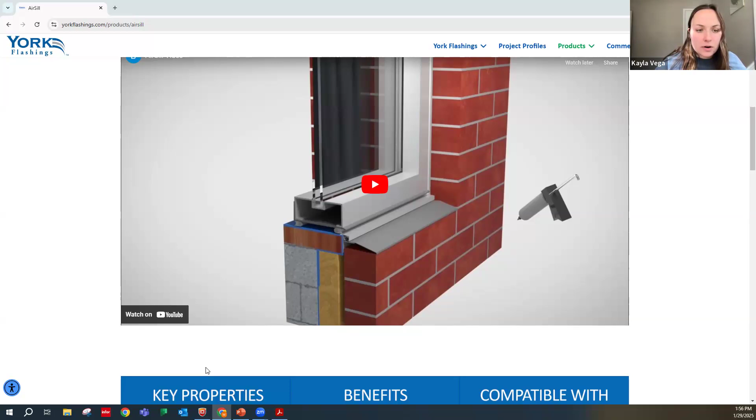Great. All right. Is there a company that provides the flashing receiver at windowsills, or is that part of a window manufacturer? Great question. So it is our flashing receiver and clip product. So it's something that York actually provides, but it has been used in conjunction with other window manufacturers. Good to know.

All right. We've got a question and a compliment. This person says, great job. You're always a great reference and leader in the industry. Can you talk about the self-adhering term bar that is compatible with roofing materials?